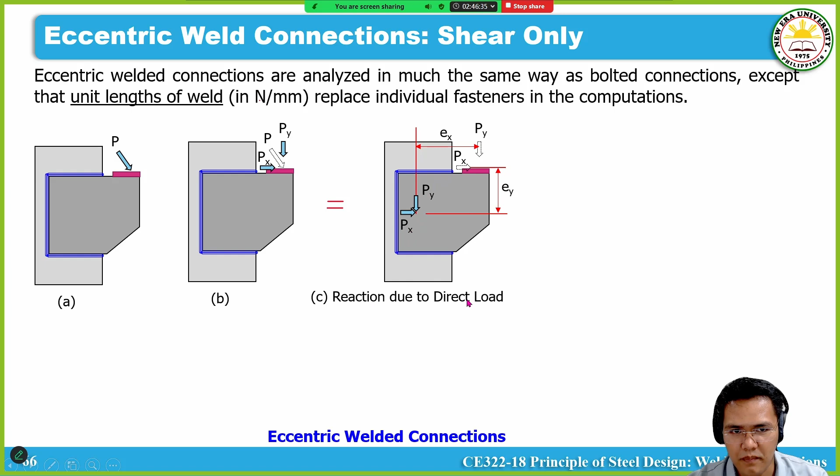Okay? So hindi natin dapat kalimutan yung effect ng torsion or torque. Yung pag-transfer mo doon, meron yung equivalent torque na you also need to calculate yung reaction separately. Okay? So ano yung difference nito with bolted connection?

Well, yung analysis ng eccentric welded connections would be based on the unit length of weld. Let me repeat, yung analysis natin would be based on a unit weld per 1 millimeter. Dati kasi per bolt ang analysis natin, no? Eh pag weld, ano lang 'yan, per 1 millimeter halimbawa.

And usually yung nag-govern diyan yung pinaka joints mo, no? Ano mo ng weld group, yung pinaka end. Yan yung dapat mong i-check kung ano yung critical.

Now similarly in terms of the formulas, ganun lang din yung R sub dx, o yung reaction due to direct load at x direction anywhere doon sa weld mo, ang sabi that is equal to P sub x, itong resolved component, divided by the total length of your weld group. Yung R sub dy naman is equal to P sub y divided by L. Mas simple siya, okay?

Now pagdating sa torque, ganun pa din yung formula, parehas na parehas. You could see na yung R sub tx, x component, that is equal to the torque T times yung y distance, kasi x component, divided by the polar moment of inertia. Yung y naman, R sub ty, x distance. So parehas lang yung formula. Yung torque natin, base dito sa direction ng mga loadings natin, resolved component is similar.

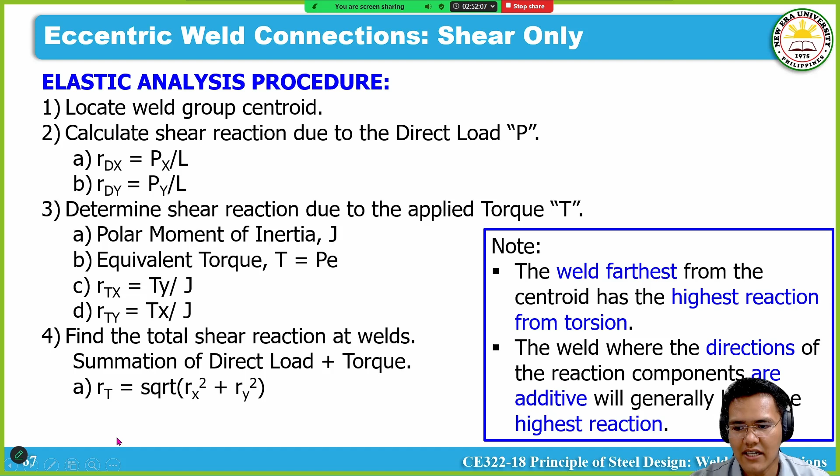You could see na parehas yung steps natin, ganun din. Meron tayong tip dito to understand kung sino yung magiging critical na location ng weld. So, yung pinakamalayo doon sa centroid, would usually have the highest reaction from torsion or torque. And yung weld, na kung saan yung direction ng mga reaction mo is additive in effect, will have the highest reaction. Okay? So, ito yung dalawang rule na i-check natin.

Okay, sige, so mag-example problem tayo. So example, problem number 4.

Determine the required size of weld W using E70XX and LRFD. Determine the following: A. Centroid of weld group from point A. B. Reaction due to the direct load P. C. Polar moment of inertia of weld group. D. Reaction due to equivalent torque T. And the required weld size W.

Okay, so this problem number 4 is a design type of problem. Given yung load pero unknown yung parameters or yung dimensions. So let's solve this one.

This should be quick lang kasi parehas lang to sa eccentric bolted connections, wala namang nagbago. The only difference is we would analyze yung system natin per unit length, millimeter. So sige, solve natin.

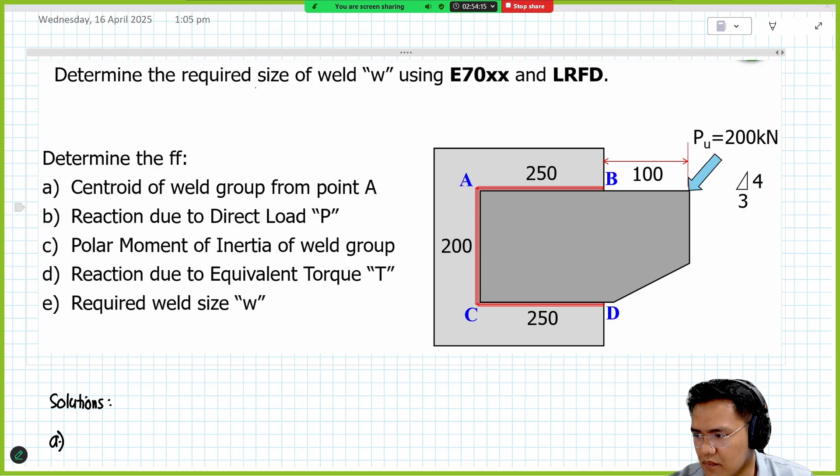As usual, ang hahanapin natin first step, yung weld group centroid. Sabi niya from point A daw. Let's kunin natin yung figure, screenshot natin.

For this item, we would calculate the centroid of weld group.

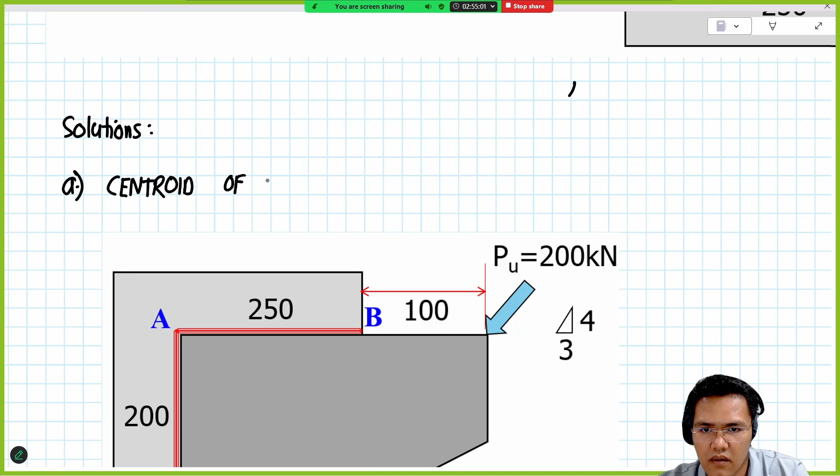I think na-discuss last time, yung first step talaga natin in solving this type of problems. Centroid, then we would define yung other parameters. Okay, sige, mag-centroid muna tayo.

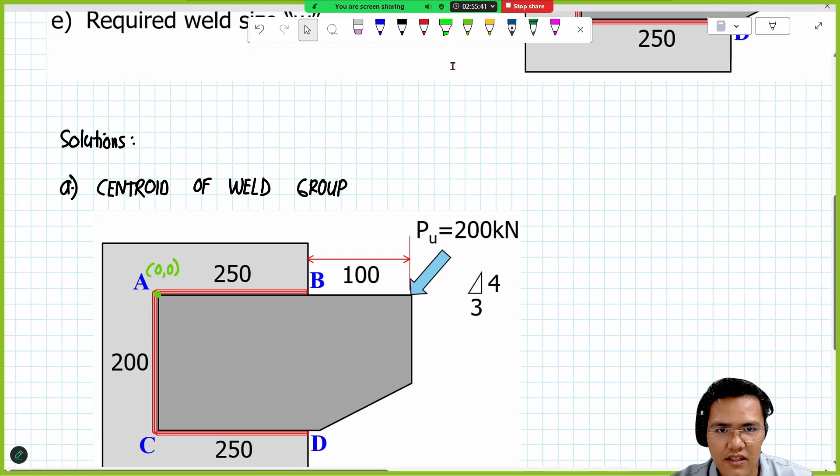Ang sabi niya, assume origin mo itong point A, which is ito. Assume natin na ganito. Kung yan yung centroid natin, by simple assumption, kung ito yung weld natin, yung centroid niyan, since nagkaroon ka ng weld dito sa side na to, kung yung lang sanang horizontal, alam mo na agad sa gitna yung centroid ng dalawang weld na yun. Eh nagkaroon ka dito ng third weld length, yung centroid mo somehow andito.

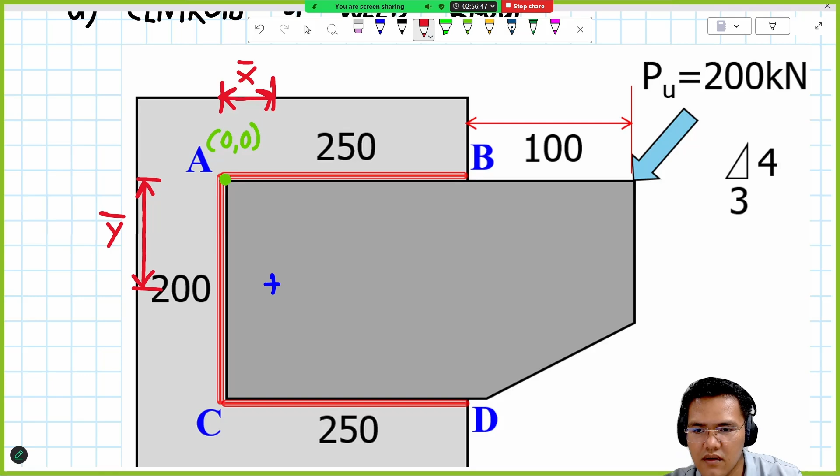We could say na yung distance na to from the origin to the centroid is distance x bar. Yung centroid naman na to from this point, from this point to this point, dun sa centroid, vertical distance naman, ito by common sense alam na rin natin to. Ito yung y bar natin, pero by looking at it, alam natin na common sense that is 100.

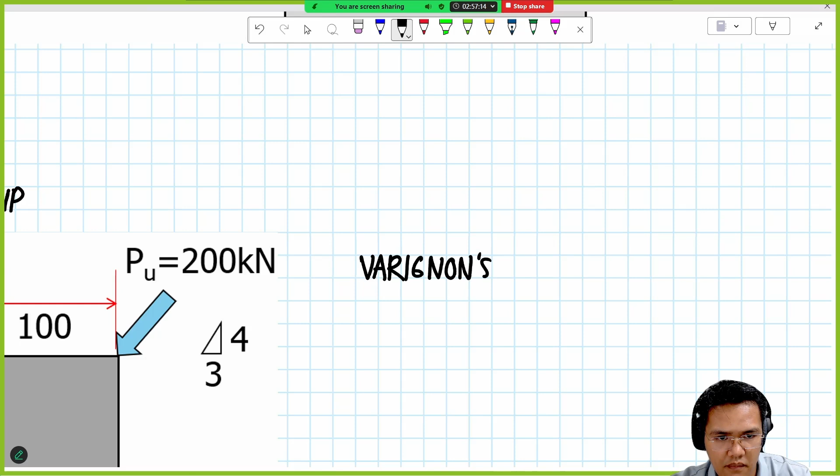Okay, 100. Now balik tayo sa calculation ng centroid. So the formula na applicable dito, ganun pa rin, we need to use Varignon's theorem. So as per Varignon's theorem, the x bar and the y bar is equal to summation of area, individual area, times its centroid, divided by area total.

Sa bolt per number of bolts, di ba? So dito, length of weld ang usapan natin. So we would convert this, modify this to a different equation: summation of length of weld times yung centroid niya, divided by yung total length of weld. Okay, this would be our formula. Now apply natin.

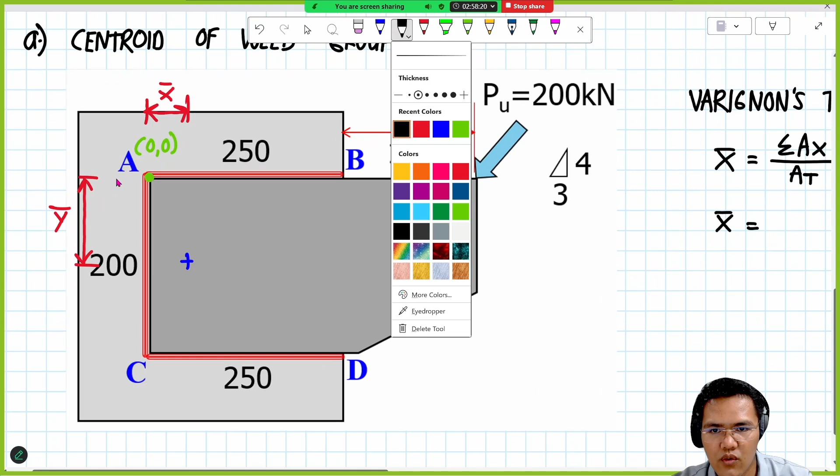Apply natin yan. Punta muna tayo, sabihin natin na itong weld na to, yung centroid niya is obviously andito, for this weld AB. Similarly on weld CD, length CD ganun din, nasa gitna din. Yung AC naman, andito lang, yun yung centroid ng weld niya.

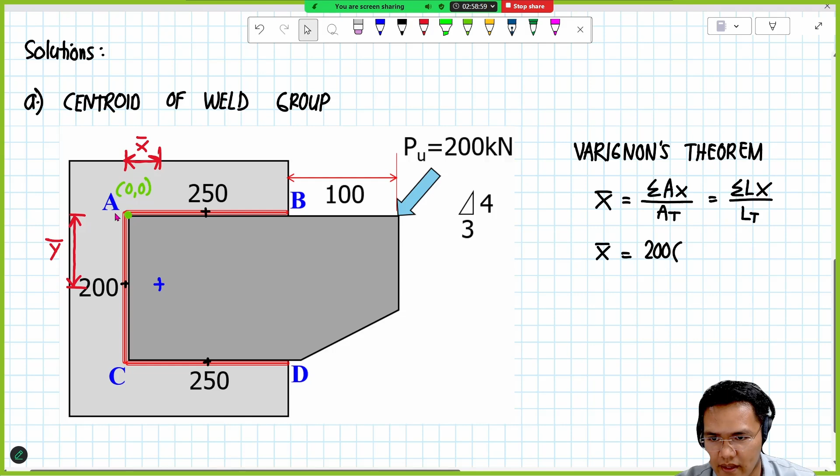Ngayon, unahin muna natin yung AC. Ano ba yung length niya? Yung length ng weld AC is 200. So let's input 200 times yung x distance niya, ng distance niya from the origin. Obviously, that is 0 kasi nag-coincide siya, wala siyang x distance, so meaning yung multiplier natin dito would be 0.

Plus, so let's start with weld length AB. Para sa AB, yung total length natin, as per formula, is 250. Now yung location ng centroid ng weld AB is andito. Ano ba yung distance niya from the origin? Well that is simply 250 divide 2.

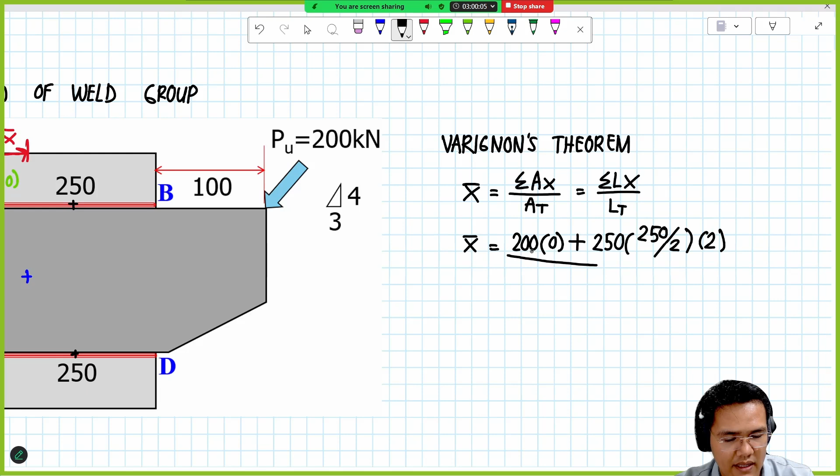At pwede rin nating ma-obserbahan na yung weld length CD is somehow similar with weld length AB, so might as well times 2, to simplify our calculations. Ngayon, divide natin to with the total length ng ating weld group. Yung total length natin is 200, plus 250 times 2. So meron tayong x bar, ilan to? 89.28571.

89.28571 millimeter. Now, in terms of the Y bar, this is common sense. But yeah, we could say it's by observation, or we could apply the formula. It's a similar formula, but let's just say by observation.

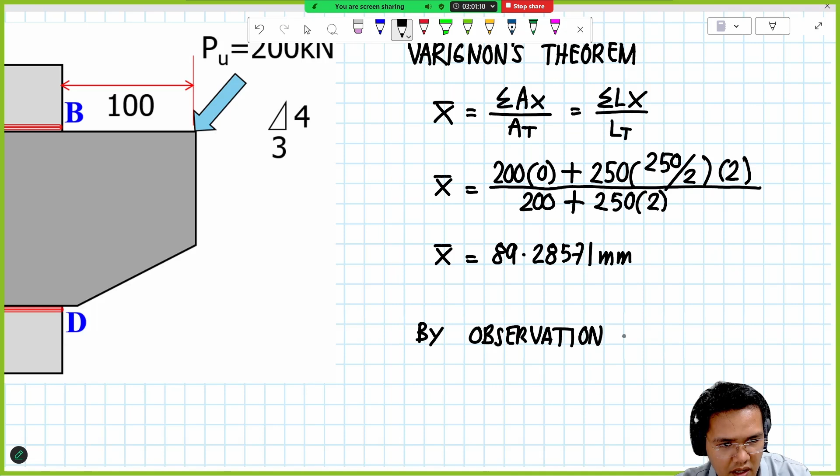I'm guessing you get what I'm saying because somehow it's symmetrical with respect to the Y. So we could say that Y bar is at 100 mm. Y bar is 100 millimeter. And then our other distances.

For example, this distance from the centroid of the weld group to the point of application - this distance we usually define as the eccentricity in the x direction. Similarly, from the point of application to the centroid, this is what we call E sub y.

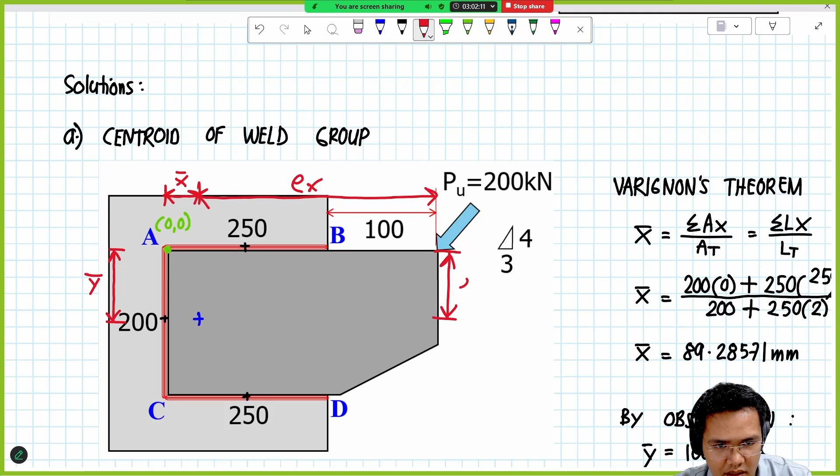Now, by observation, we could say that E sub y is also equal to Y, Y bar, based on our observation. So E sub y is also equal to 100 millimeter.

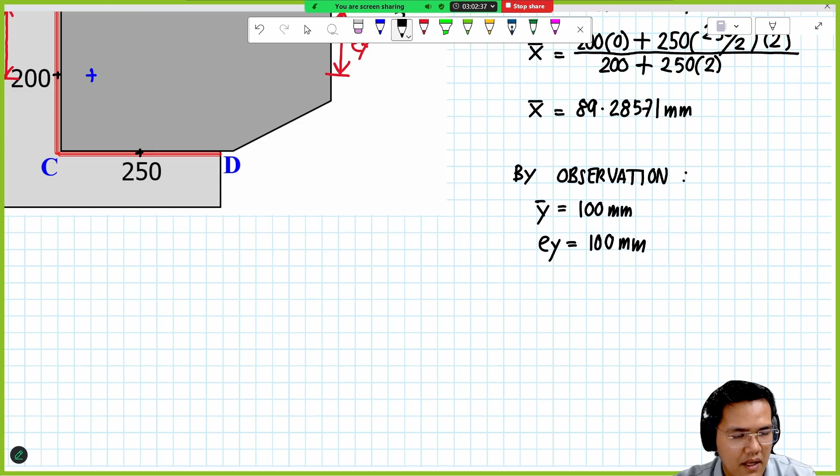Now, for E sub x, we can get that from 250 plus 100 minus x bar, to get our E sub x.

So we would have 250 plus 100 minus x bar. So we have our parameter E sub x. Just plug in the x bar. What's our E sub x?

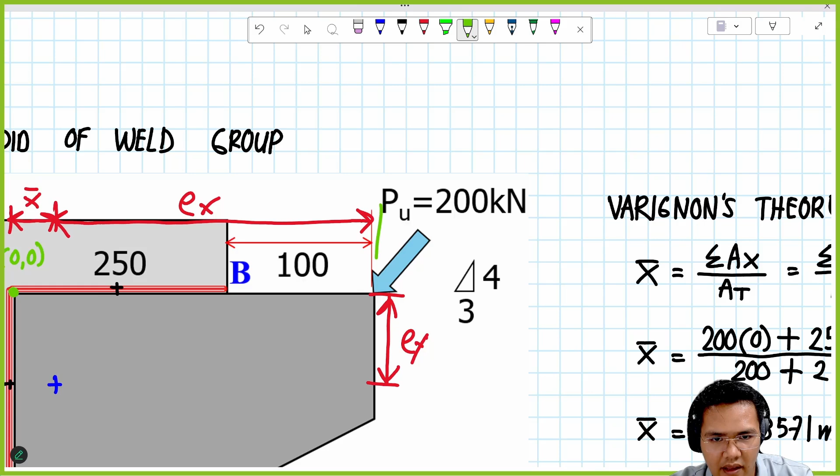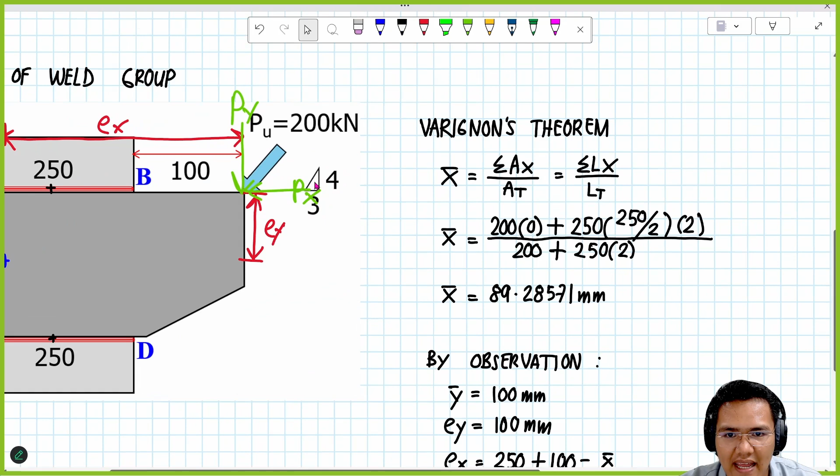So might as well calculate both of those. For this one, we could say it's common sense, based on similar triangle - we have a 3, 4, 5 triangle. So our P sub x is synonymous with the 3.

So we could say that P sub x is P sub u times 3/5. And the value of our P sub u as per the problem is 200 kilonewton. So plug that in, and our value for P sub x is 60% of 200, so 120.

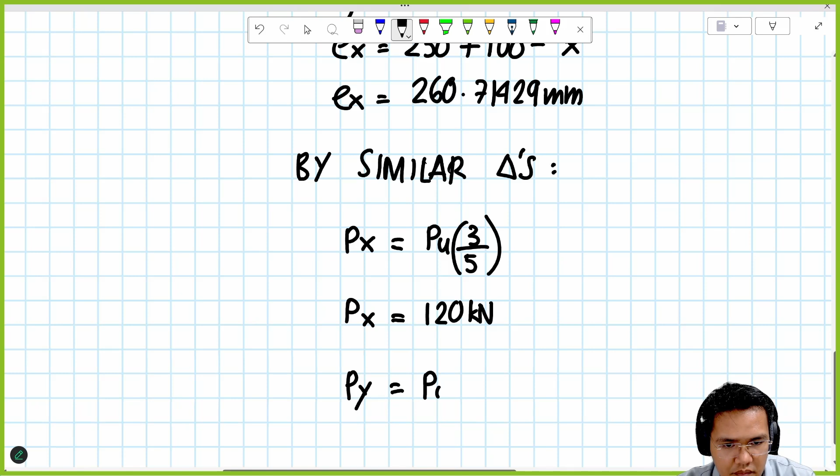And then our P sub y is simply P sub u times 4 over 5. So plug in the 200 here - 80% of 200, so 160, if I'm not mistaken.

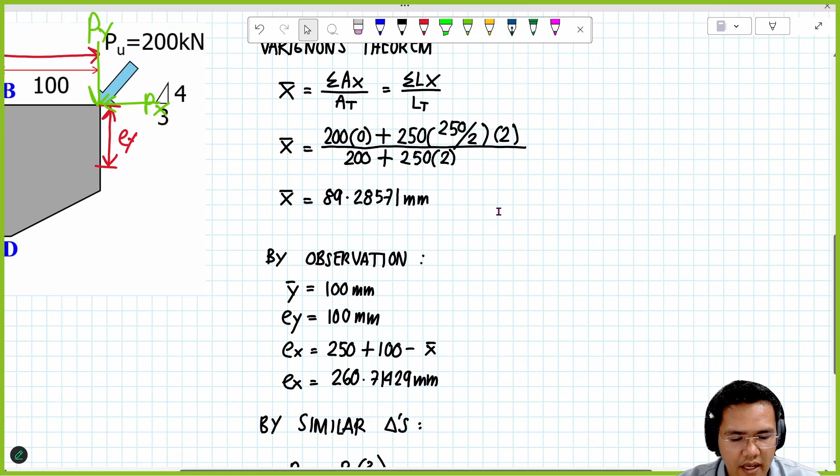So we already have the centroid, the location of the centroid. So next item: reaction due to direct load P.

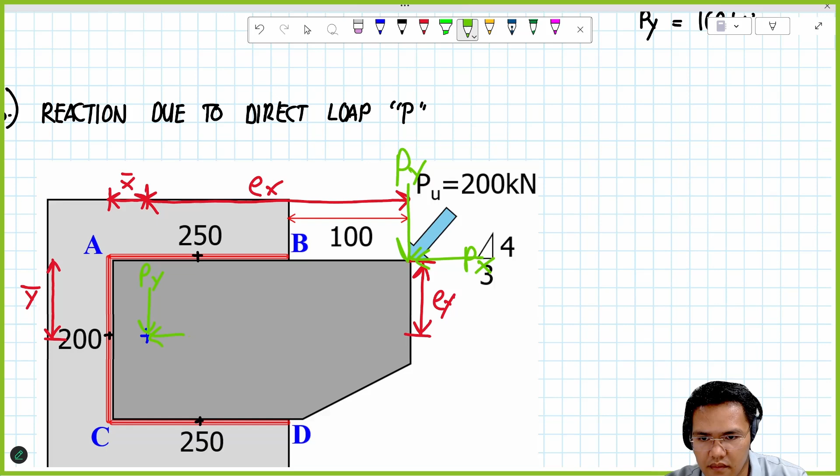Now, the next step is to check a reaction at a point. For example, for point D, this is a direct load. If it's going down, the reaction should go up, so we have the small letter r sub dy. Now, our P sub x is going to the left, so the reaction here should be going to the right.

So that's Newton's third law - for every action, there is an equal but opposite reaction. So it's similar to this, consistent with the other points for direct load.

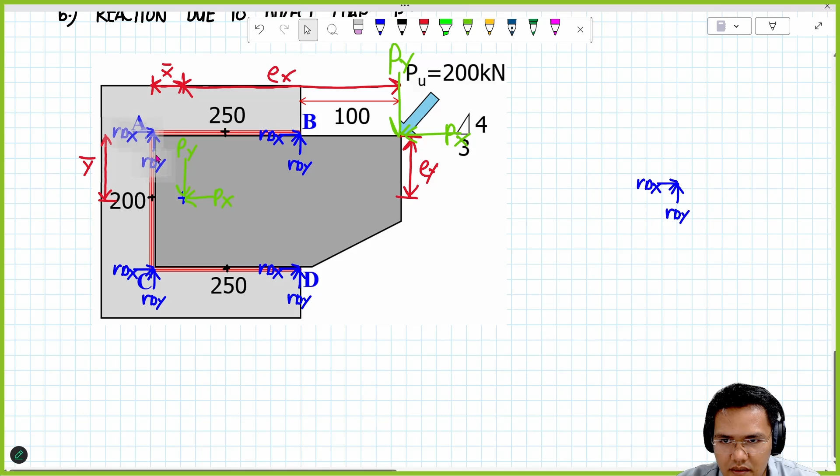Now we already defined that, so let's go back to the formula. As per our presentation, that is r sub dx is equal to P sub x divided by L. As simple as that. So we have the value of P sub x which is 120, and 160 for P sub y.

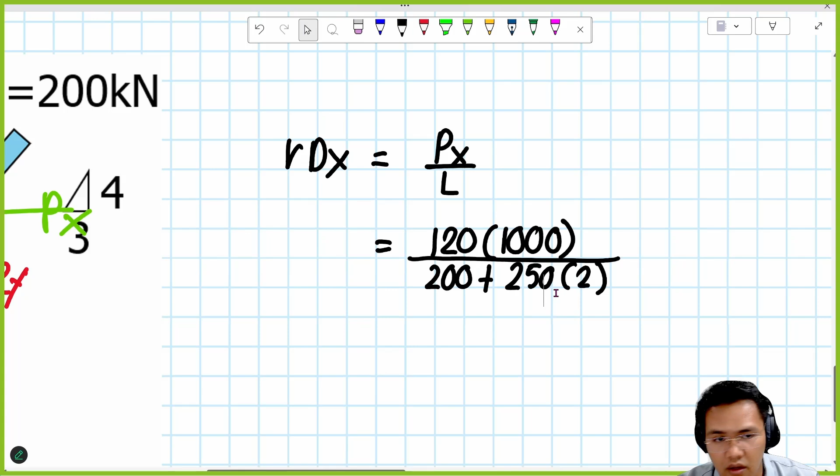So 120, divided by the total length of our weld, which is 200 plus 250 times 2. By the way, the unit we want is Newton per millimeter, right? So this numerator is in kilonewton, so might as well multiply this by 1,000 to make it Newton. So we have r sub dx - how much is that?

171.42857. Okay, Newton per millimeter.

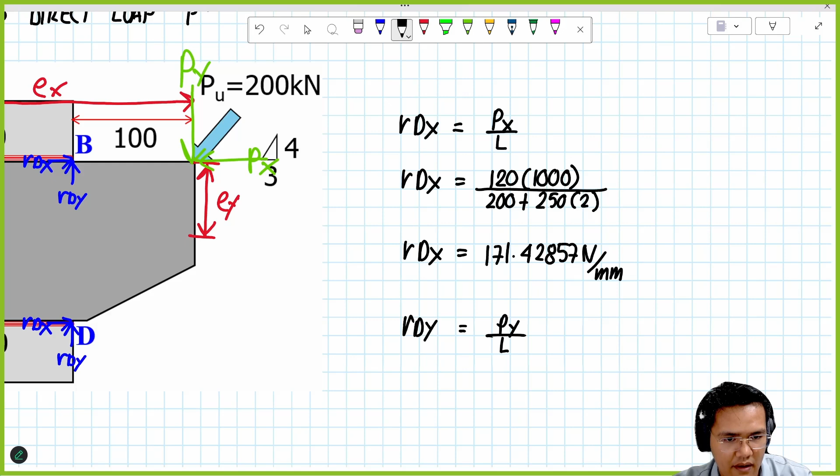Okay, now we're done with r sub dx. Let's proceed to the next, which is r sub dy. This is formula based also, so this would be p sub y divided by L. Let's take it from here. Our numerator would be 160, that's our p sub y. So we would have r sub dy equivalent to... how much is this? 228.57142. Correct? Yes sir. Okay, so we're done now in terms of the direct load.

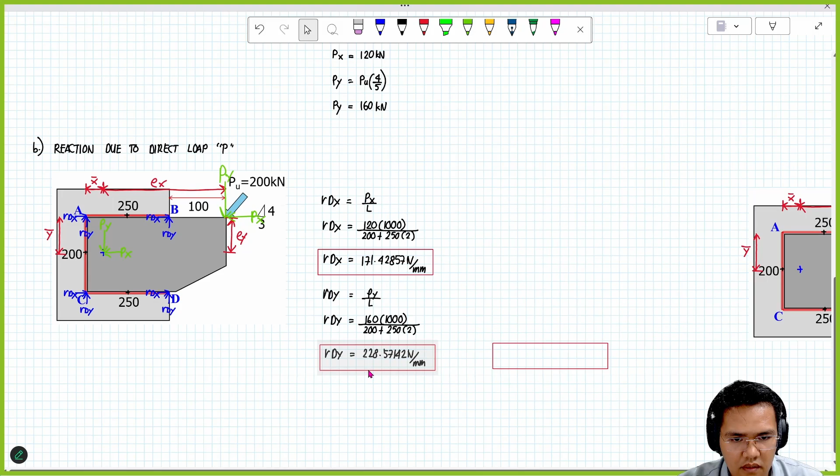So let's proceed to the next item, which as usual is the polar moment of inertia, as a preparation for the calculation of the reaction due to torque.

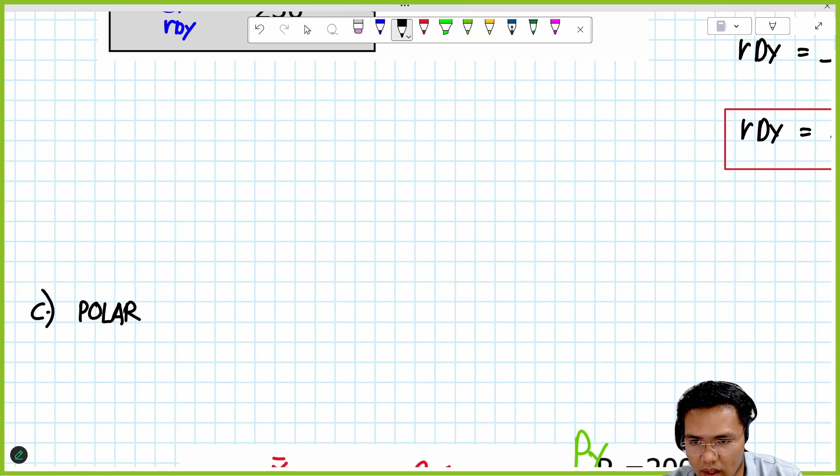Okay, polar moment of inertia of the weld group. This one is formula based also. The only question is what parameters we should use - that's what we'll discuss.

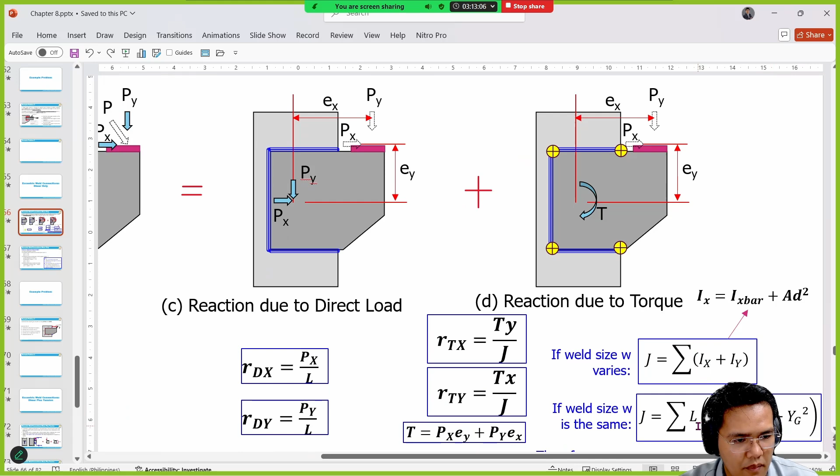So going back to the problem, in the presentation we derived the formula for when weld sizes are the same. This is the equation: J is equal to summation of L, L squared divided by 12 plus X squared plus Y squared. Let's copy that down - this is our definition here.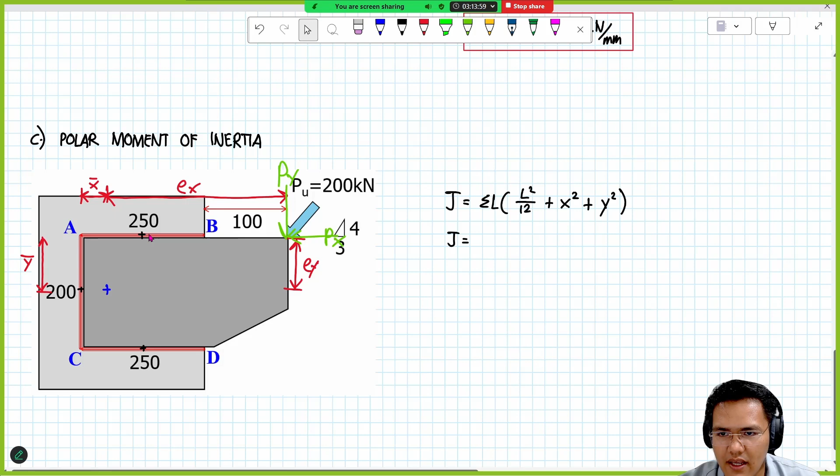Now let's plug it in. The meaning of L is the length of weld in consideration. So for example, let's start with weld AB. What is the length of weld AB? Well, that is 250.

250, multiply that by the length of that weld, which is 250, squared, divided by 12. Plus, what is the distance of weld AB from the defined centroid? That's the definition of X and Y. Let's look at X first.

The question is, what is this distance from centroid? The centroid of the weld group to the centroid of weld AB - that's the definition for X, for weld AB, that 250.

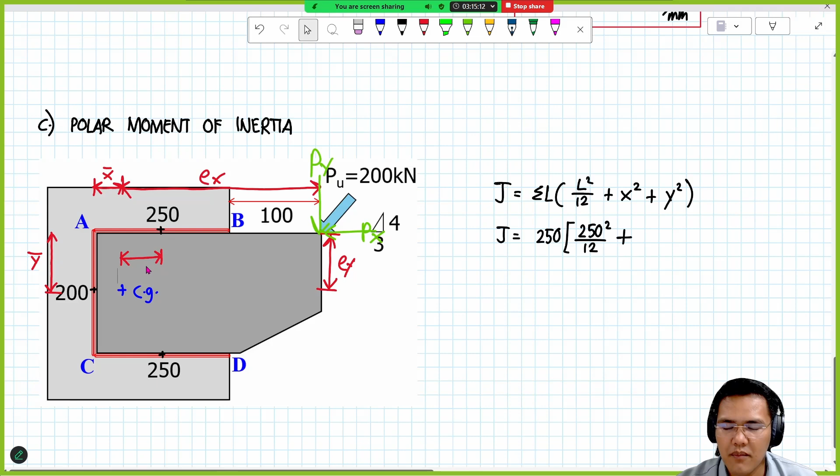So how do we calculate this? How can we calculate this X squared? Well, we know that half of weld AB is 250 divided by 2. This distance from this point to this point, that is 250 divided by 2. So if that's 250 divided by 2, then minus the X bar, we get this distance, which is the definition of X here.

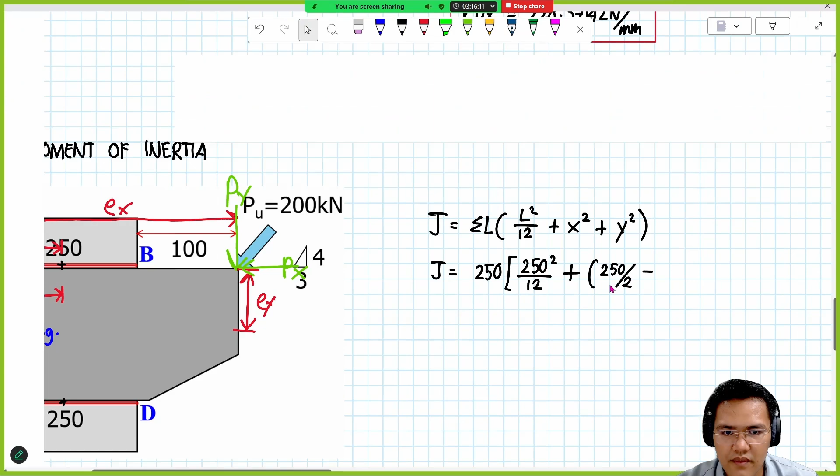So let's plug it in: 250 divided by 2, minus our X bar which we calculated earlier. Let's plug that in, and we get that squared for X squared.

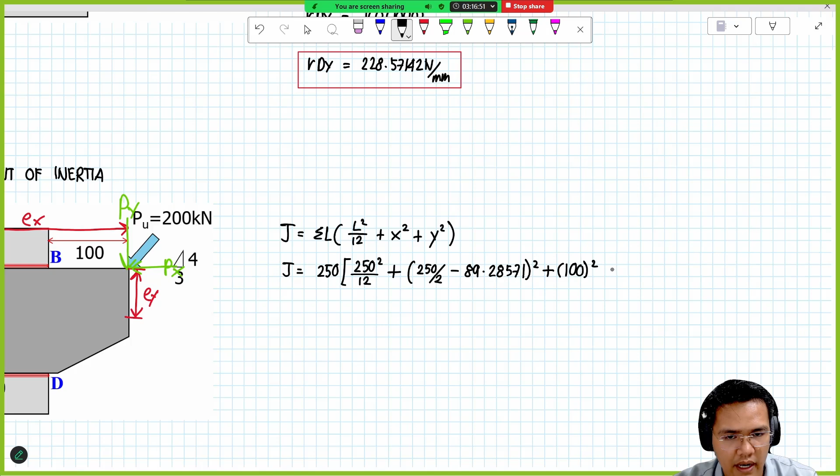Plus the Y distance from the centroid of weld AB, this 250, to the assumed calculated centroid. Well, that is Y bar, 100 millimeters - common sense. So that would be 100 squared. Okay, so we're done for weld AB.

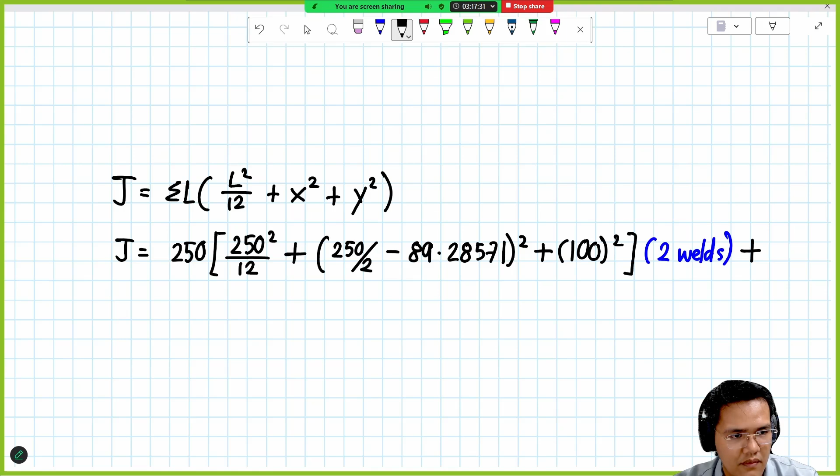May isa pang weld na matitira. Punta tayo sa next last weld, yung weld AC. For the weld AC, yung length natin is 200.

Apply natin yung formula ulit na hanggang maubos: 200 squared divided by 12, plus yung distance niya from the assumed centroid or calculated centroid. From distance ng weld AC to the centroid, that is simply X bar, so gamitin natin yung X bar.

So ito yung X bar. Parehas lang yan pagdating dito, okay, so yan, X bar.

In terms of Y distance naman, kung i-observe natin, ano ba yung difference nung centroid ng weld AC sa CG? Obviously zero, so ibig sabihin dito, we would have this one as 0.

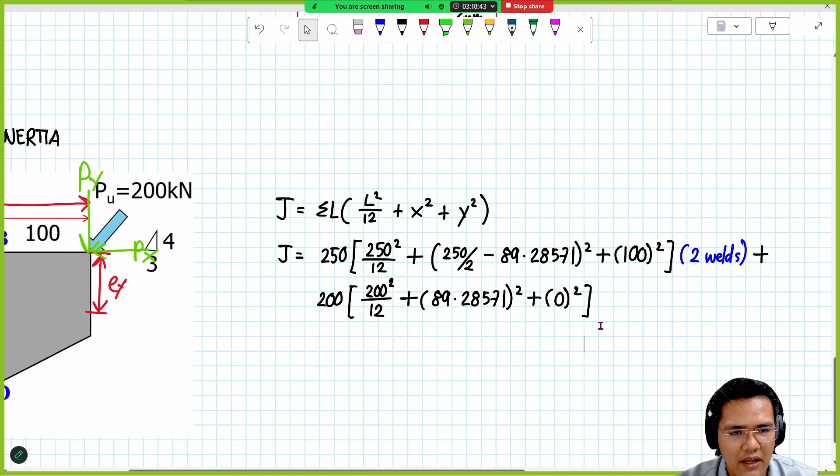So all in all, kung i-simplify natin yung value ng ating J, ano yung value ng ating polar moment of inertia? Ilan to? 10502975.

Pakibigyan mo ako ng comma para alam ko kung ano ba yan. Ilan? 10,000,000 - okay, 10 million, 502,975.83. Wala nang kasunod to.

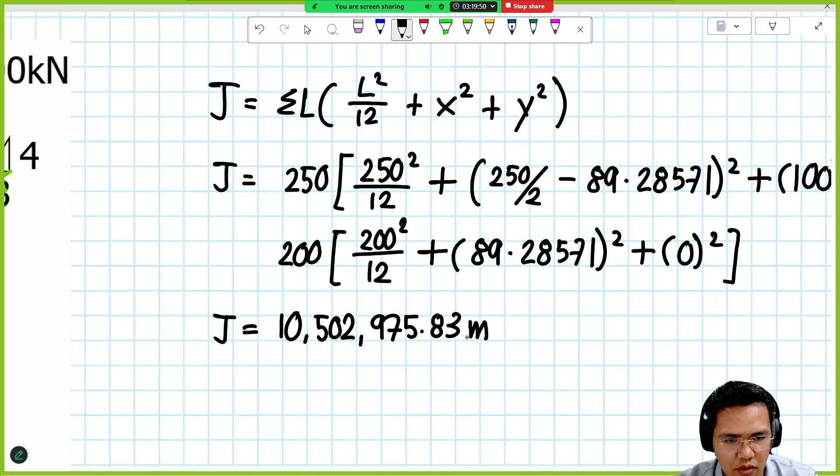Okay, unit analysis tayo, o unit check tayo. L times L squared, so millimeter cube. Paki-take note na lang yung mga unit natin para hindi kayo nagkakamali, may difference to sa bolted connection. Alam niyo na rin yung discussion natin kung bakit nag-iiba yung unit nito, kasi polar moment of inertia dapat millimeter to the fourth.

Pero may discussion tayo diyan last chapter, and similar lang yan dito, kasi yung mga formulas natin naka-modify na yon. Sige, I'm assuming na ang ibang estudyante, ganito rin nakuha nyo. Pare-pareho kayo ng value, assuming na tama na to.

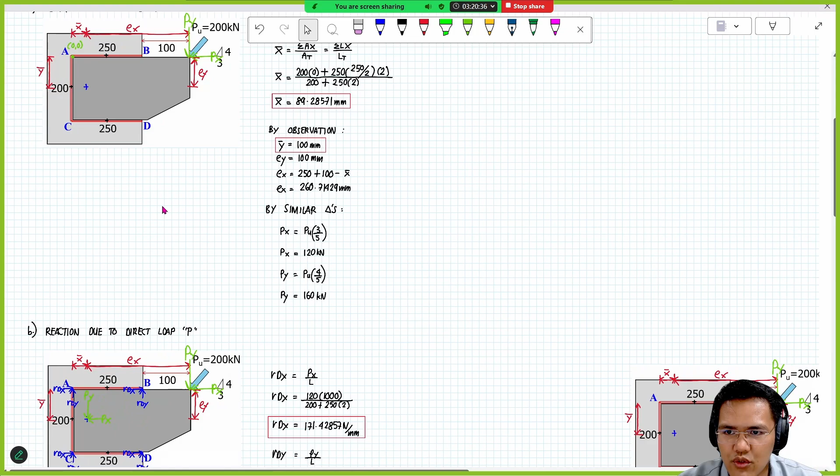So next is yung reaction due to torque. Sa reaction due to torque, ganun pa rin, so ito, kopya na natin to. Paki-unmute, meron ano, yung sa mga co-host natin, pakisuyo. Reaction due to equivalent torque T.

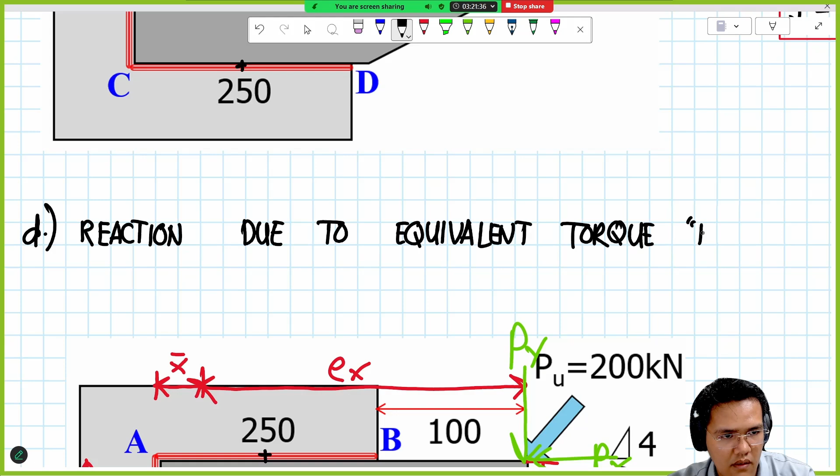Ang first step natin is to have a summation moment dun sa CG, para malaman natin ano ba yung general direction ng ating torque, equivalent torque. Yun yung first step - dapat ma-define natin yung direction. So ang ginagawa natin, magsa-summation moment tayo at CG, assume equal to 0, clockwise positive.

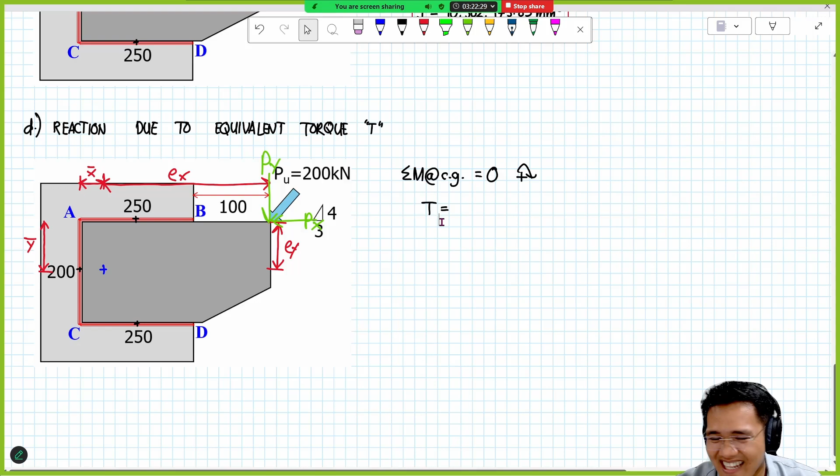So meron tayong torque. Sa summation moment dito, unahin natin itong p sub x. Yung ikot niya is counterclockwise, so meaning negative, ang p sub x negative - first time nagkaroon tayo ng negative. Moment arm nito is e sub y.

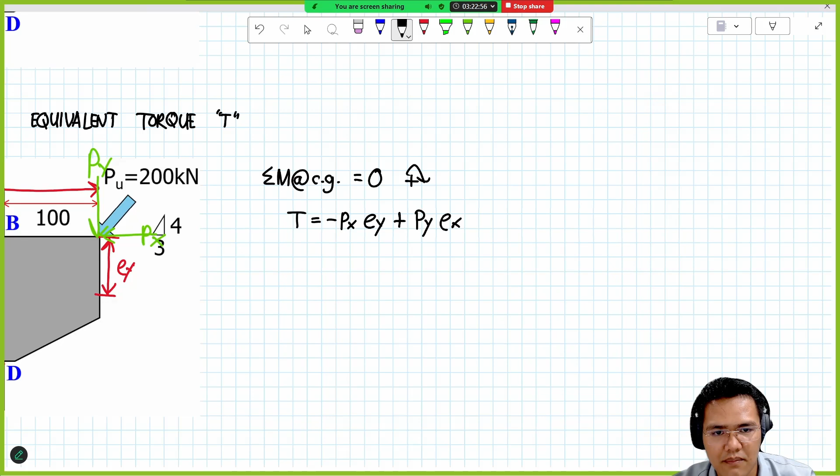Sana naintindihan - summation moment at CG, yung p sub x natin counterclockwise, yung p sub y naman clockwise, so meaning positive. So we would have p sub y times yung moment arm niya na e sub x.

Now plug in na yung mga values para ma-finalize natin. So we would have negative - kung di ako nagkakamali, this is 120. Double check natin, yung p sub x and p sub y is 160. Yeah, 120, 160, yung e sub x na lang and e sub y. Ito yung e sub x natin and this one is e sub y.

So multiplied by e sub y - ito yung e sub y natin, 100. Plus yung p sub y natin is 160, times e sub x, ito yung value ng e sub x natin. Plug in natin yan, this one magiging positive. So ilan to? Positive pa rin.

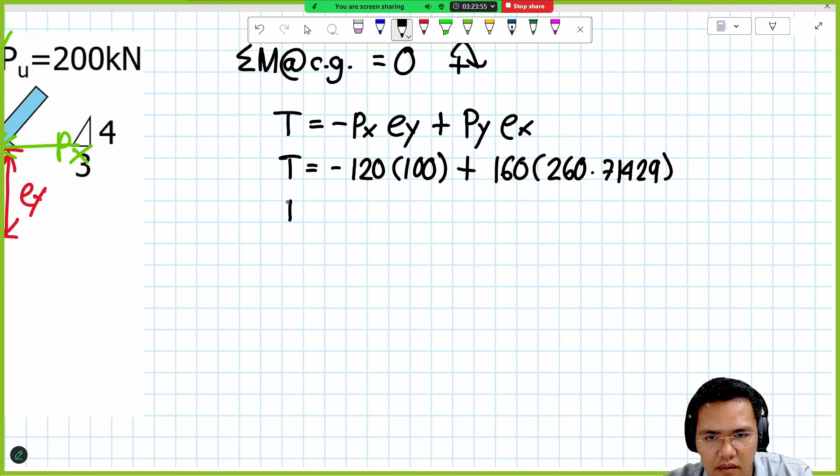So ilan to? Teka lang ha, 29, okay sige, paki-save muna. Ito kasi kilonewton, ito millimeter, sabi natin consistent tayo newton and millimeter. So dapat i-multiply pala natin to, paki-take note na lang into 1,000 para lagi tayong newton millimeter yung mga units natin.

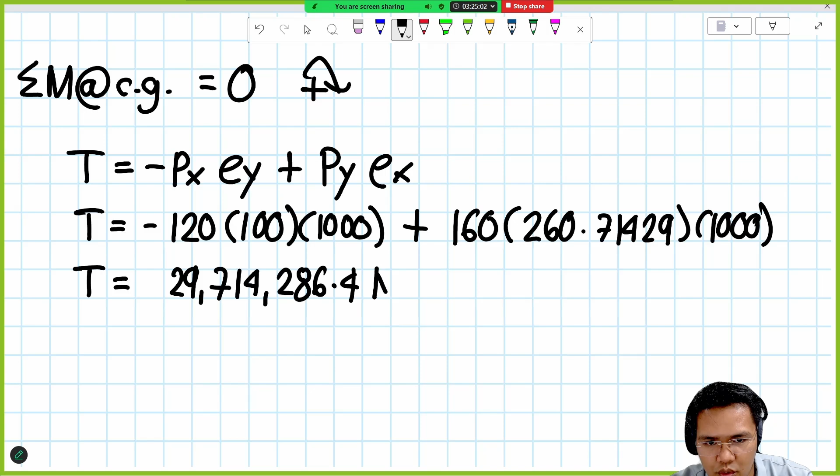Tapos pati itong side na to, times 1,000 for the conversion. We would have ilan to? 29 million, 700,000, 14,000, 286.4. Newton millimeter.

Okay na tayo sa torque, we could now draw yung direction niya kasi alam na natin na positive, so ibig sabihin overall yung direction ng torque natin is clockwise. Ngayon, in terms of the direction dun sa mga critical points, yan lang naman kasi kukunan natin ng reaction, diyan lang most likely mag-govern.

Ang first step, mag-draw ka ng line from CG, pahirapan to, yan, okay, assuming na straight line na yan. Then let's draw the direction nung reaction mo, should be on opposite direction - clockwise meaning counterclockwise. So ibig sabihin yung arrow mo dito na in 90 degree would be on this like so, this one would look like so.

So, this one would look like so, and this one would look like so. Ngayon, meron niyang mga component, yung mga torque natin, so this one somehow look like this.

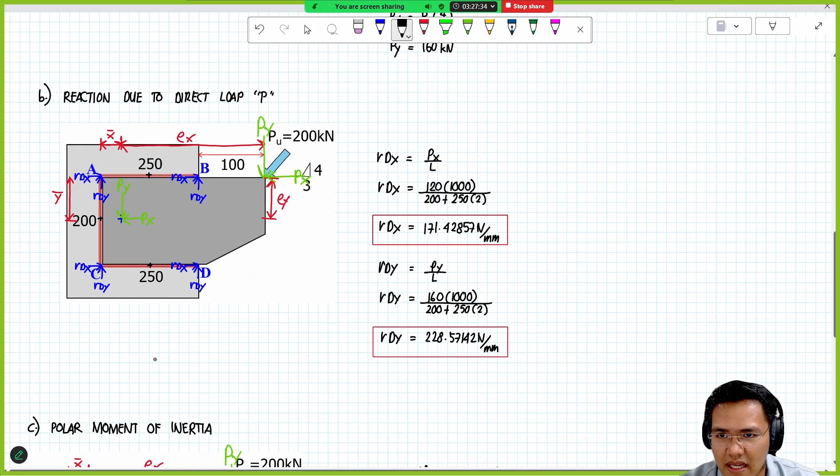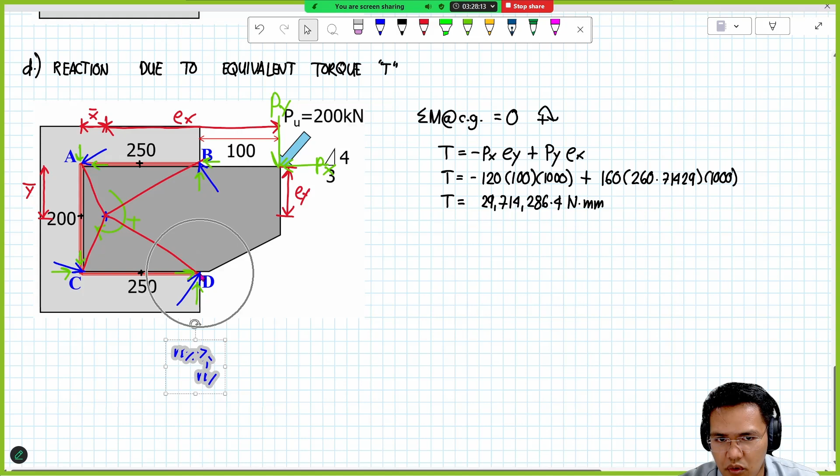We're okay with rule number 1. It's either point B or point D. If we include rule number 2, that the effect should be additive with the direct load P, let's go to the direct load P. We checked that the direct load P direction is going to the right and upward. Comparing it with the equivalent reaction due to torque T, we already have an idea who will govern. In rule number 1, we cancel out A and C. The ones likely to govern are B and D. In rule number 2, common sense tells us point D will govern. So let's be point specific and not waste time since we already know which one governs.

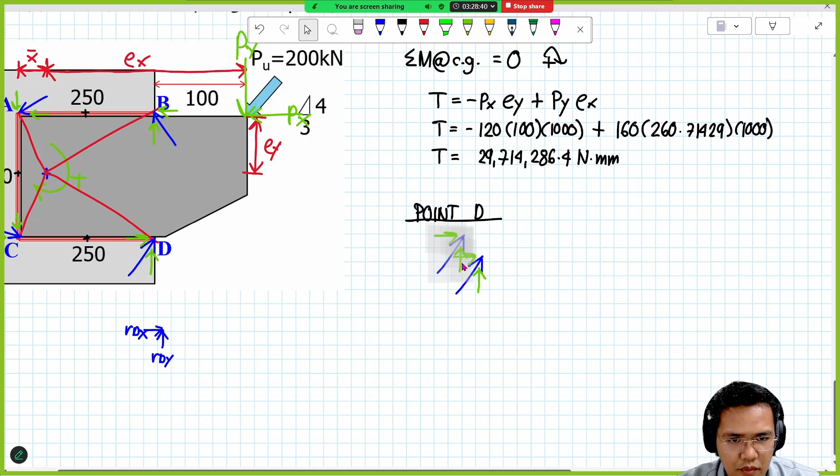So let's calculate the reaction at point D. Our assumption - let's do the torque first since this is really the problem here. This is not yet the total reaction. So for the torque, we could say this reaction is the reaction due to torque at point D. Therefore we have r sub T dy, and this one is r sub t dx.

Okay, looks good. If we apply our formulas, we could say r sub t x, as far as I remember, is equal to the torque T. Since that's the x component, we need the y distance, divided by the polar moment of inertia. In this case, for point D, we apply the torque T that we calculated. This is our torque.

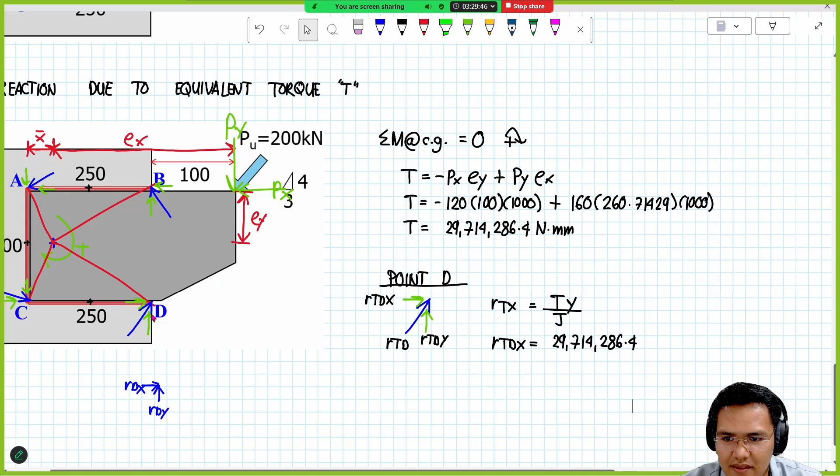Multiply by the y distance. What's the y distance of point D? That is simply 100. Divided by the polar moment of inertia of our weld group, which is this value allegedly. I'm assuming you all calculated the same J. If what you gave me is wrong, our presentation would be wrong. So we would have r sub t dx equals to how much?

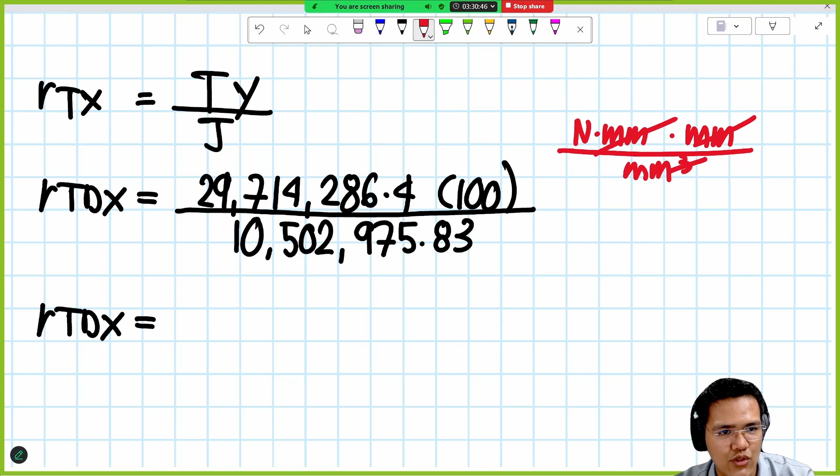While you're calculating, let me do a unit check. This 29 is in Newton millimeter. This 100 is in millimeter. The denominator, the polar moment of inertia, is millimeter cubed. So it cancels out, giving Newton per millimeter. So that's correct.

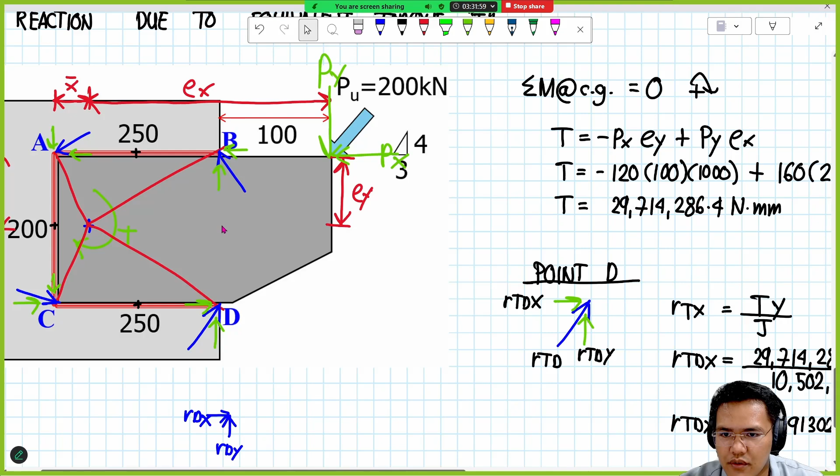Now the x distance of point D from the centroid, if that's 250, we just subtract x bar from 250. That's the distance we're looking for. So we would have 250 minus x bar. Let's get x bar from above. This is also x bar, as far as I remember.

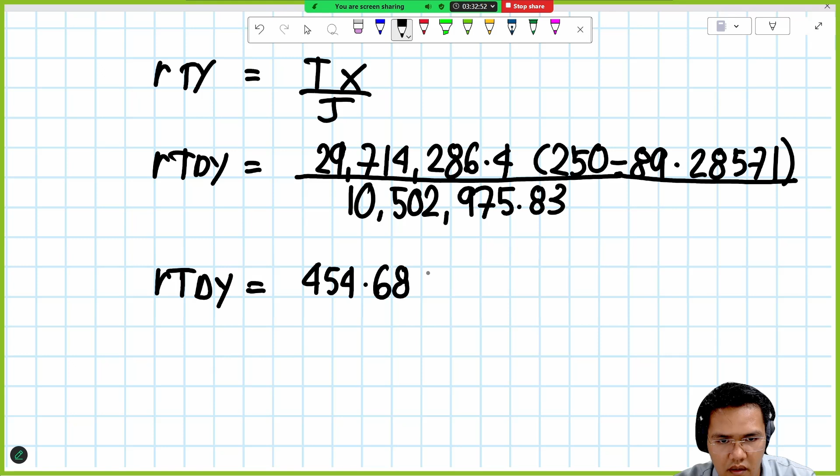Okay, next is the total reaction supposedly, right? That was skipped, but we can include it, or follow up with item E. Required weld size already. Let's input for item E, the total reaction. So we would have the required weld size W.

Okay, so number one, let's calculate the total reaction at point D, which we said is the critical point. So total reaction...

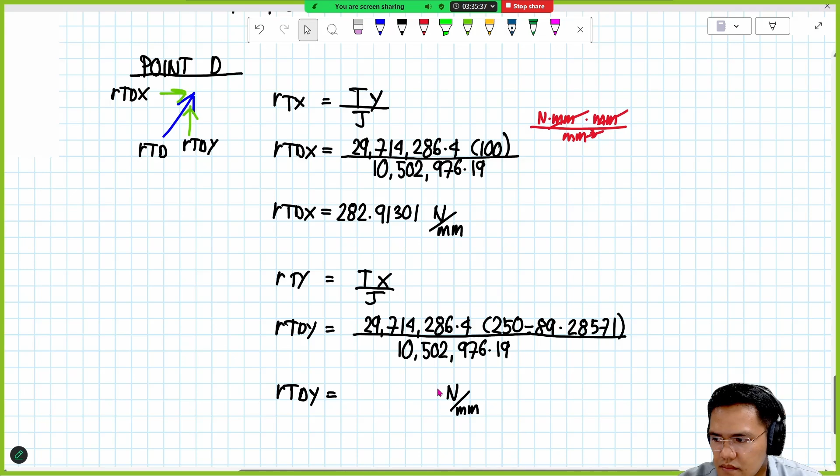282.91301. Okay, how about R sub T dy? 454.68164. Okay, 454.68164. Okay, looks good.

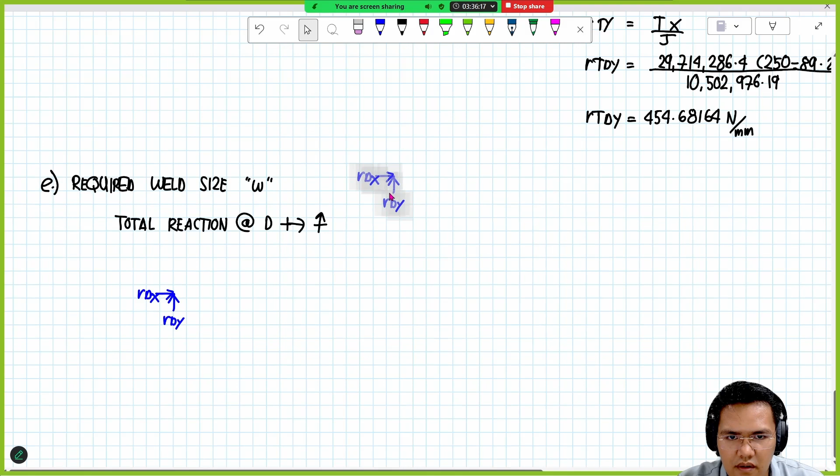Okay, so for total reaction, as usual going to the right is positive, upward is positive. Okay, this is fine now. And then let's copy this to emphasize our free body diagram at point D.

So we would have total reaction, the reaction at point D, R sub D, equal to the summation based here, all going to the right, so R sub dx positive plus R sub T dx positive, squared, plus R sub dy all upward plus R sub T dy also upward. So all positive, okay, somehow.

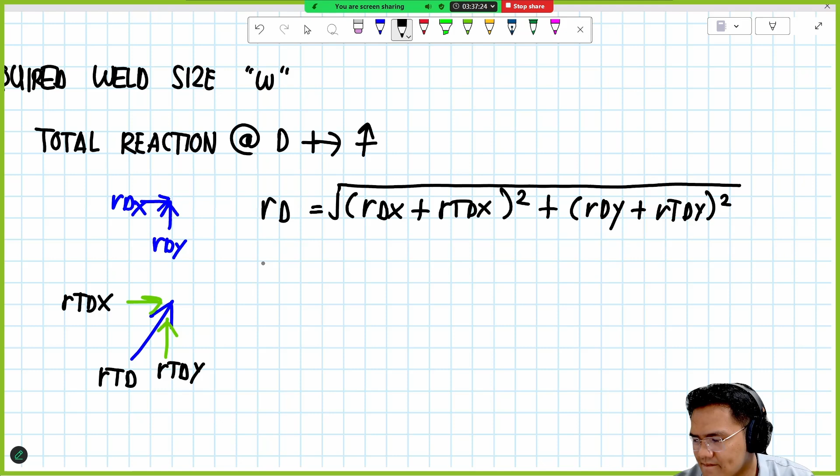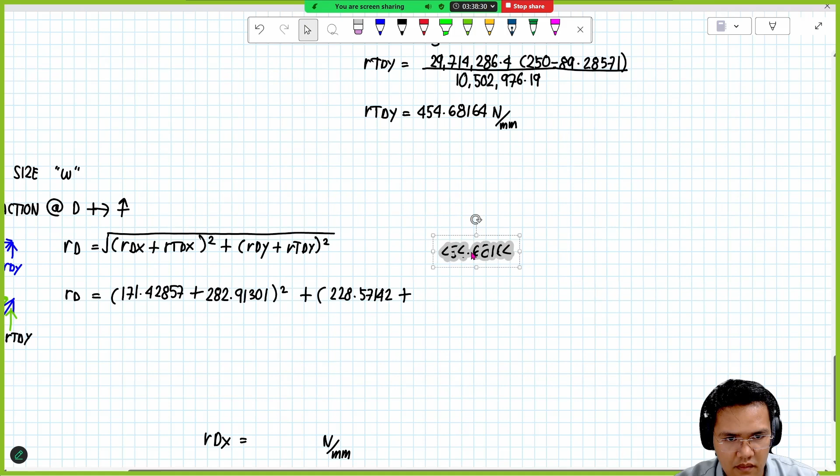Okay, we can now simplify. So R sub D equals, let's plug in the value of R sub dx, these values, R sub dx, R sub T dx, this one, squared plus R sub dy, plus R sub T dy, squared, and we get the square root of that.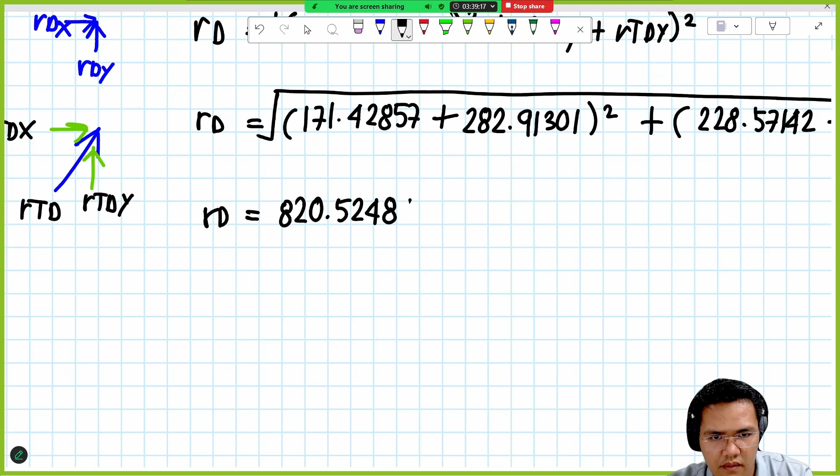Okay, how much is this? 820.52484. Okay, same unit, Newton per millimeter, okay.

And in terms of the weld size, since that's what's being asked here, we need to use the formula. What's being used, LRFD or ASD? LRFD. And E70, okay, so let's copy problem 1 so we can finish.

I think this will be the last problem for tonight. So we can take advantage of this formula. Okay, it's exactly the same since LRFD is applicable here too.

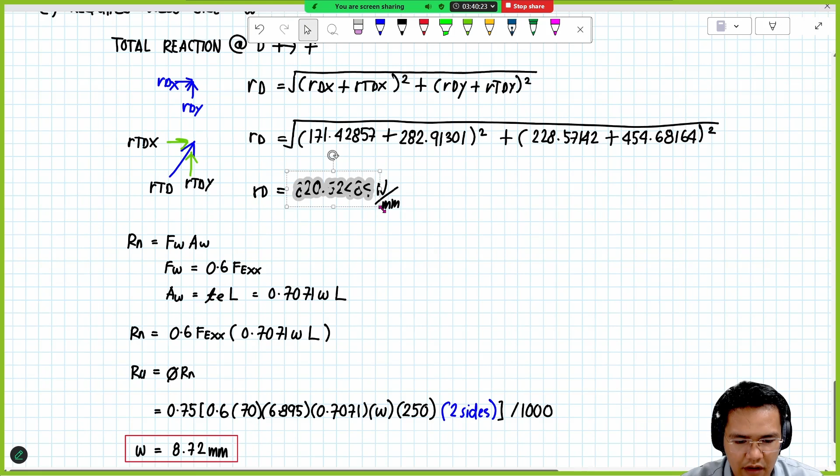Now what we'll do is R sub U, since this design would be the reaction, the maximum reaction. That's what we always do, we equate the maximum reaction there. And then the rest of the equation, for example 0.6 F sub EXX, so 70, somehow the same, 6.895 is our conversion, 0.7071 W, which is what the problem says? I think 10, right? No, because we're going to design that, so it's unknown, W is what we're solving for.

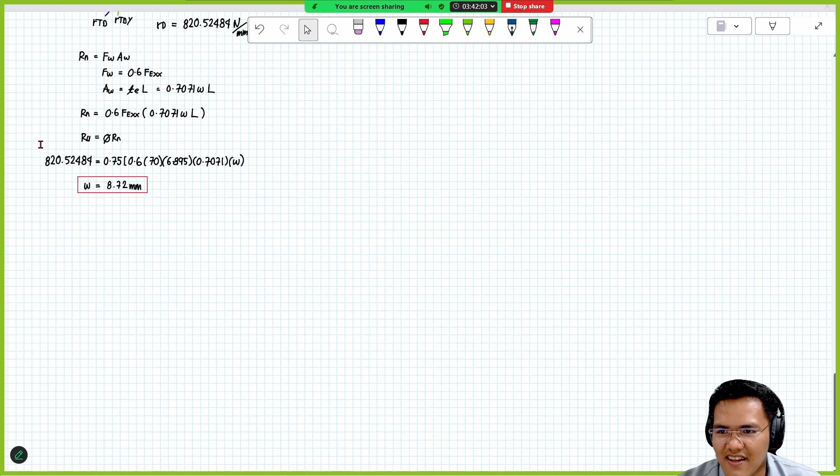You're wrong. Why? I would remind you guys that our formula here is per unit length, or per 1 millimeter length is our analysis of the weld. Okay, per 1 millimeter length is our analysis, which means you shouldn't multiply by that, because the answer should be per millimeter. Okay, so that's it.

I want to do a unit check before we leave this, just to make sure we're on the same unit. This is Newton per millimeter, so 70 ksi is Newton per millimeter squared, so the only parameter here is W, which is in millimeter, that cancels, meaning Newton per millimeter equals Newton per millimeter, no conversion needed. So please take note that our weld analysis is per 1 millimeter length, you don't really need to apply the length in this equation, you already have the value to use.

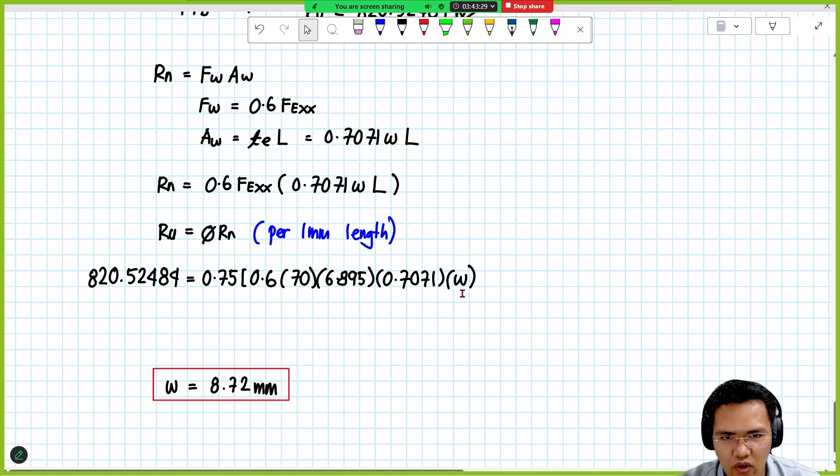So how much is this, how much is our W here? 5.34. Okay, 5.34 millimeter.

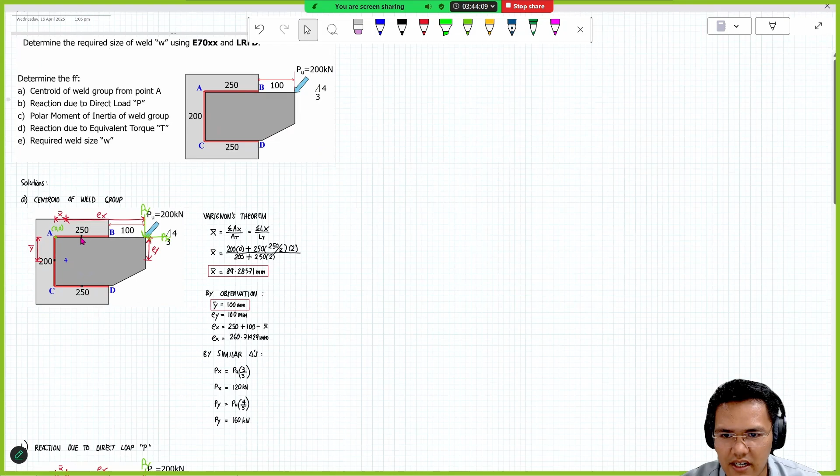Any questions or clarifications before we end our discussion for tonight? Is anything unclear about the last problem, problem number 4?